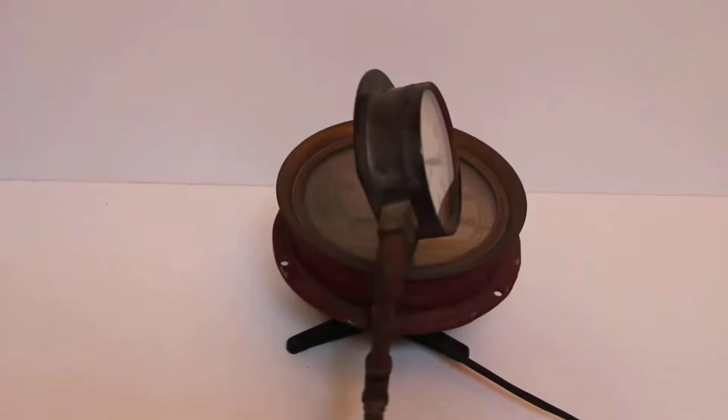Railroads did not just cut him from the advertising. They buried what was killing him: boiler pressures surging past the limit before tearing cabs apart, widows waiting 18 months for a $4,800 payout on a life.

The dark truth behind these men is not just how they suffered. It is that an entire industry was designed to make sure you would never know they existed.

Steam sold itself as progress. Every glossy postcard, every magazine ad, every railroad calendar promised speed, power, and a future racing just beyond the horizon. The locomotive gleamed, a silver bullet against the sky. The Empire on Wheels, read a 1907 postcard, its swirling Art Nouveau letters crowning the image of a spotless engine.

No soot, no sweat, no sign of struggle. The engineer sometimes appeared, arm raised, the very picture of command. But the fireman, the man who fed the beast, was never there. Not even a mention. The back of that postcard offered a poem to steel and steam, but not a word for the hands blistered raw in the cab.

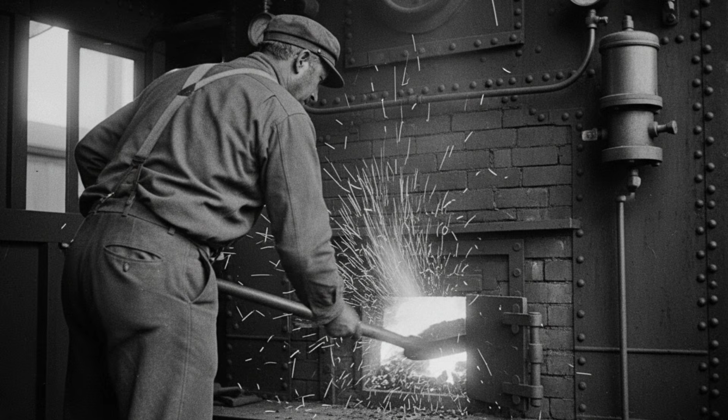Railroads knew the power of myth. They sold the public on the promise of adventure, of jobs that lifted men from the dirt and set them on the rails to glory. Opportunity awaits, the recruiting posters claimed, as if the path to prosperity lay straight through the firebox.

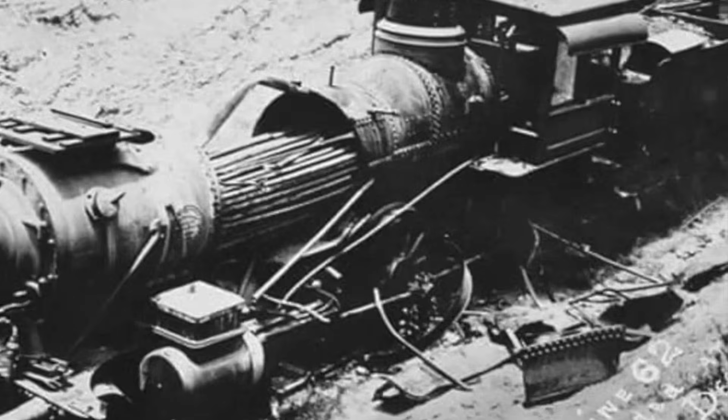The truth was buried under layers of ink and optimism. Every ad left out the choking coal dust, the heat that warped bones, the knowledge that a single missed gauge or a faulty valve could turn a shift into a death sentence.

The companies did not just erase the danger, they erased the men who faced it. In the golden age of steam, the worker became a ghost, sacrificed to keep the machine running and the legend alive. The public saw only the shine. The cost, measured in lives, was hidden in plain sight.

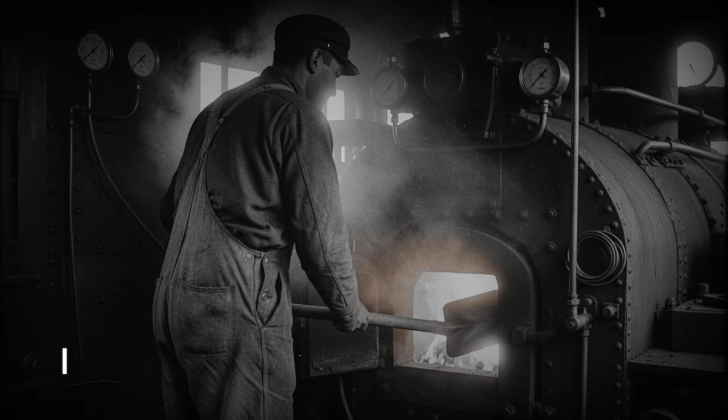In the shadows, behind every polished locomotive, a man stands alone, his face smeared with soot, his shirt plastered to his back with sweat. He has no name in the company brochures, no place on the commemorative plaques. The fireman is a silhouette half lit by the furnace he feeds and half lost in the smoke that chokes the cab. His hands grip the shovel, knuckles white, muscles burning from the endless rhythm of lifting, tossing, lifting again.

The world outside sees only the gleam of the engine, the promise of speed, the adventure of the open rail. Inside, the fireman breathes air thick with coal dust, his lungs filling with grit, his eyes stinging from the heat that warps steel and flesh alike.

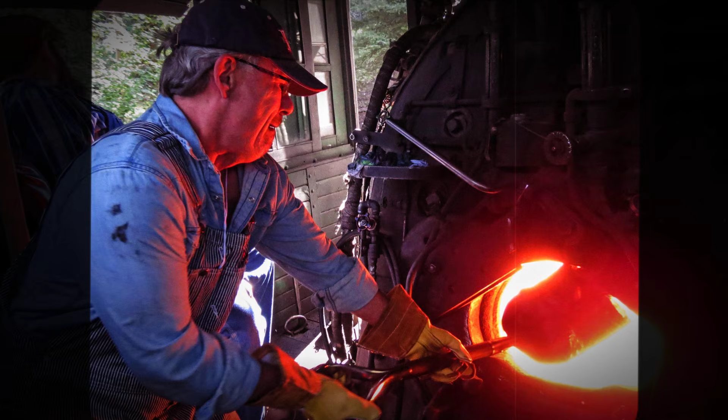No one asks about the man whose back bends with every mile. No one remembers who kept the pressure steady, who watched the water glass for the deadly drop, who risked being boiled alive if a single valve failed. The fireman's portrait is missing from the archives, his story wiped clean by the same hands that polished the brass.

In the rare photograph that survives, he stands in the cab, almost unrecognizable, face blackened, eyes hollow, caught in a moment between shovelfuls. He is not the hero of the railroad myth. He is its casualty. The golden age of steam demanded bodies to fuel its legend. The fireman was both the engine's beating heart and its most disposable part.

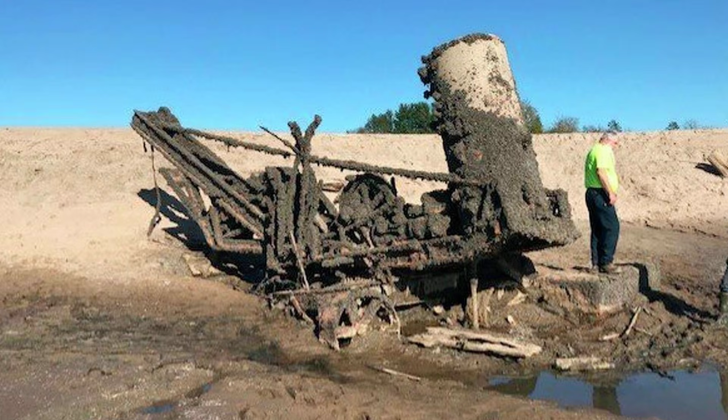When disaster struck, it was his name that never made the papers, his family that waited for a letter that never came. The cost of progress was measured not just in miles, but in men erased, swept away like ash from the firebox, leaving only the shine for history to remember.

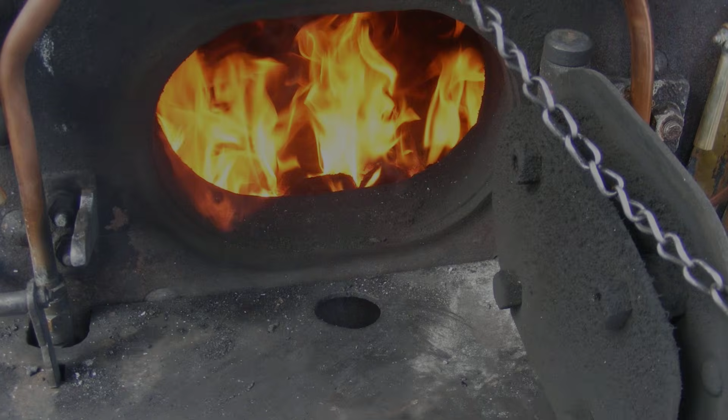The myth of the iron horse runs on sweat. Inside the cab, the fireman's arms never stop moving. Shovel hits coal, coal hits fire, again and again, 30 to 45 times a minute. The rhythm is brutal, mechanical, almost inhuman. Each scoop weighs 50 pounds, and there is no room for hesitation.

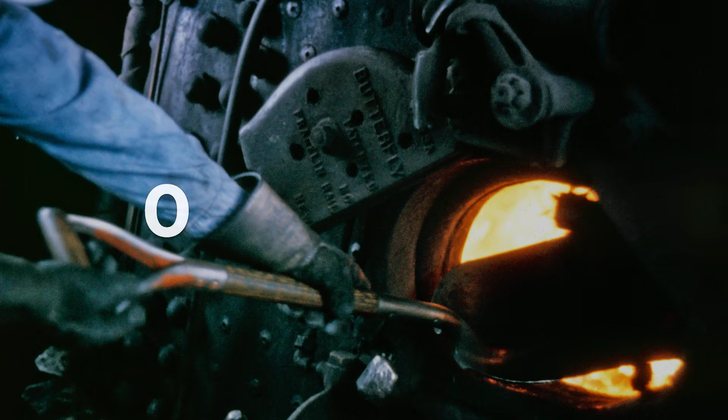On a steep grade, the demand doubles: 2 tons of coal an hour, every hour, just to keep the pressure up and the train alive. That is over 4,000 pounds, enough to break a man twice over before noon.

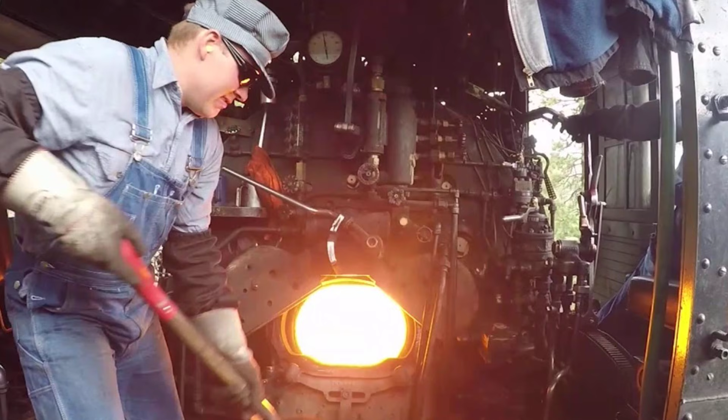The firebox roars 1,000 degrees, heat blasting through layers of soaked cotton and scorched skin. The air is thick with soot and ash, every breath a mouthful of grit. The fireman bends and lifts, shoulders screaming, back on the edge of collapse. There is no glory here, only the endless demand of the furnace.

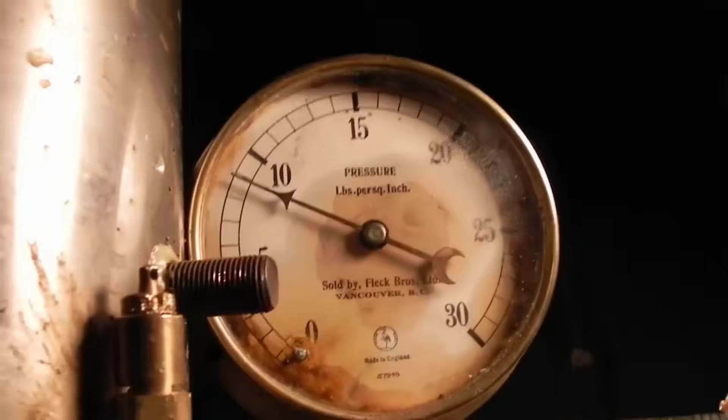Miss a beat, and the steam drops. Miss two, and the engineer curses, the schedule slips, the whole machine threatens to stall.

Railroad managers called this unskilled labor. They wrote quotas into the rule books: 1 ton per hour for freight, 2 for express, up to 4.5 on the biggest engines.

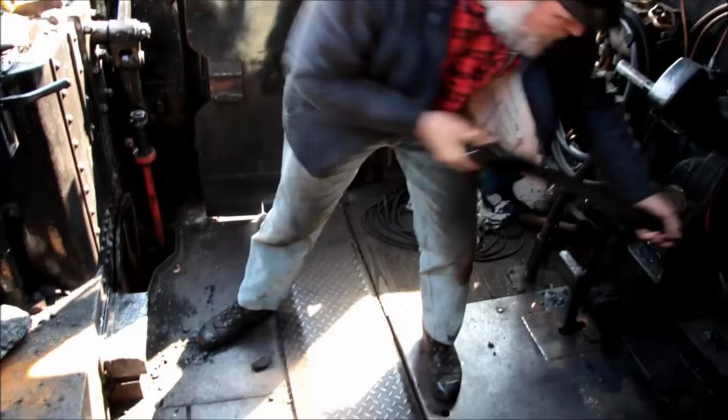The numbers look clean on paper. In the cab, they mean an unbroken marathon. One man racing a clock that never slows, shoveling coal until his hands bleed and his legs shake. No one counts the shovelfuls. No one records the moment his muscles give out.

The only thing that matters is the pressure gauge, the pounding of the pistons, the fireman's body feeding the beast. This is not the story on the postcards. The fireman's marathon is invisible, a blur of motion, a blur of pain. The train glides past towns and fields, but inside, a man is burning up mile by mile, erased by the very rhythm that keeps the legend alive.

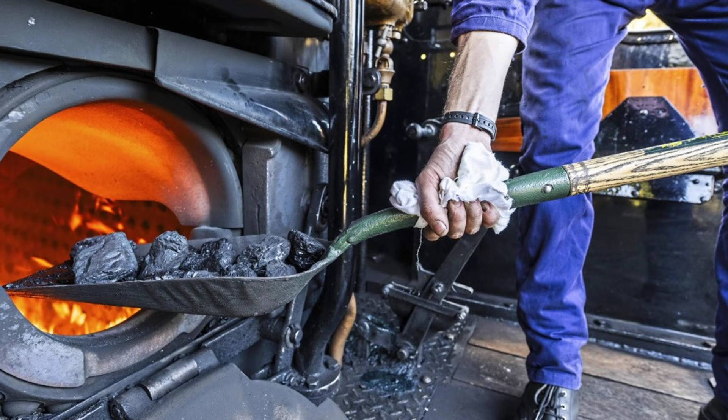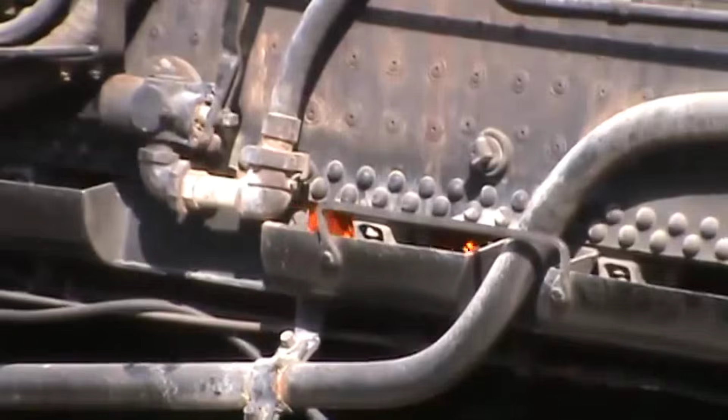The cab becomes an oven before the sun climbs above the rails. Temperatures inside reach 45, sometimes 55 degrees Celsius, a heat that blurs vision, soaks shirts through, and leaves skin raw. Open the firebox door and a blast of air hotter than a desert wind hits the face. The fireman stands just feet from a furnace burning above 1,000 degrees Fahrenheit, close enough to feel his eyebrows curl, his lips crack, his breath sear with every inhale.

There is no escape. Each shovelful costs more than sweat. The body burns through over 4,000 calories in a shift, more than a marathon runner, but without the finish line or the cheering crowd. Hunger gnaws at the belly, but the stomach turns with the stench of burning coal and hot metal. Water boils in the bottle before it can cool a parched throat.

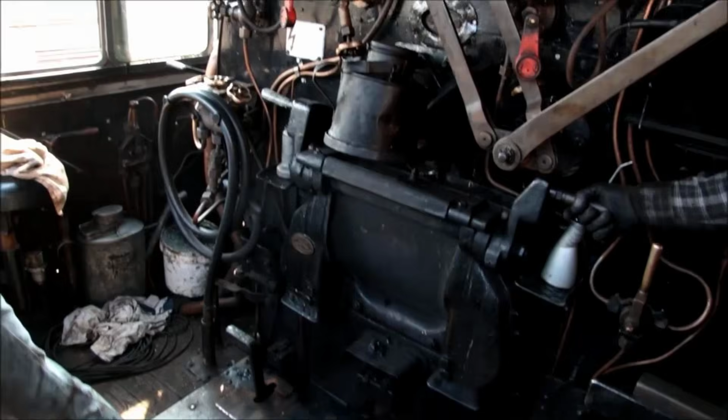Muscles cramp, hands blister and split, but the rhythm cannot break. The fire does not wait for mercy. Coal dust floats in the air, settling in the lungs with every breath. By age 40, a fireman's cough is as steady as the piston's beat. Medical surveys from the 1930s found chronic lung disease in more than 15% of firemen—black lungs, bronchitis, emphysema—diseases that ate away at life long before retirement.

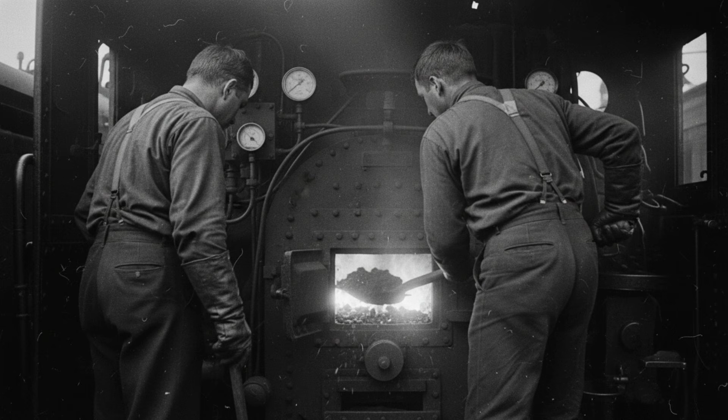Soot cakes the teeth, eyes sting. The world narrows to a tunnel of heat and grit. No one records the moment a back gives out or a shoulder tears. No one tracks the damage done by days spent in a rolling inferno. The company logbooks note the tons of coal, the miles traveled.

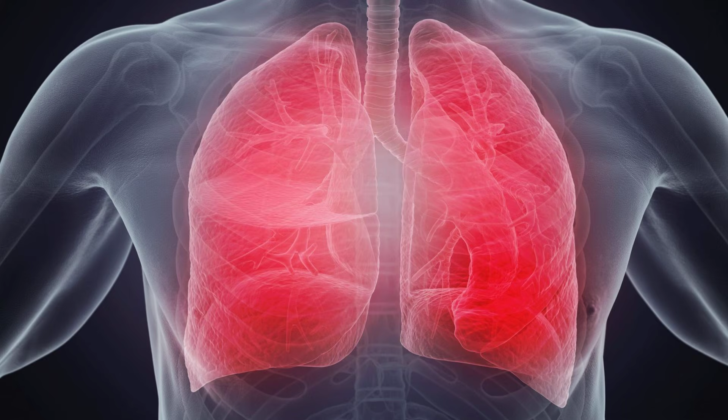They do not mention the fireman who stumbles off the engine at shift's end, trembling, gasping, older by years after a single run. The cost is written in flesh, in lungs that harden to stone, in hearts that race and fail, erased from memory as easily as wiping soot from a window. The fireman's body is the first casualty, sacrificed to keep the engine moving, invisible in the glow of progress.

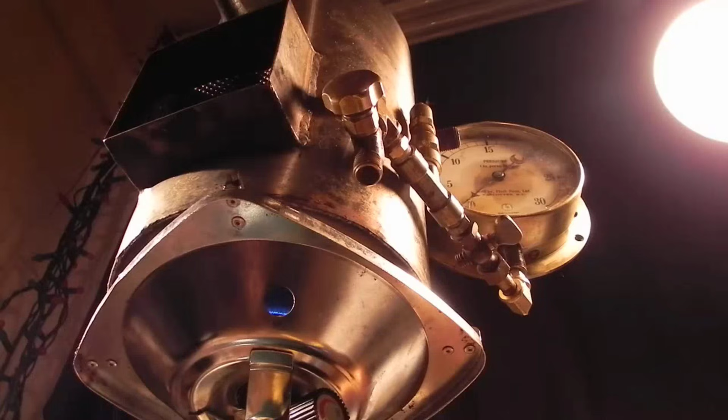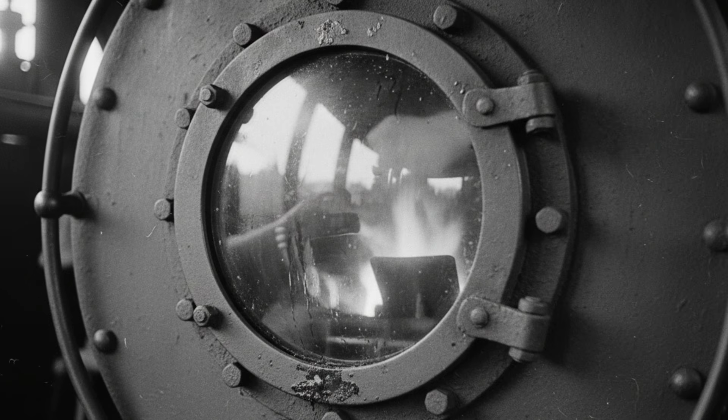Pressure built with every frantic shovelful. The fireman's arms never stopped, sweat poured, lungs burned, but the gauge kept climbing. The engineer barked for more steam, his eyes on the clock, not the needle. In the roar and glare, the fireman squinted at the water glass. Just a flicker, a shimmer, a guess at the level.

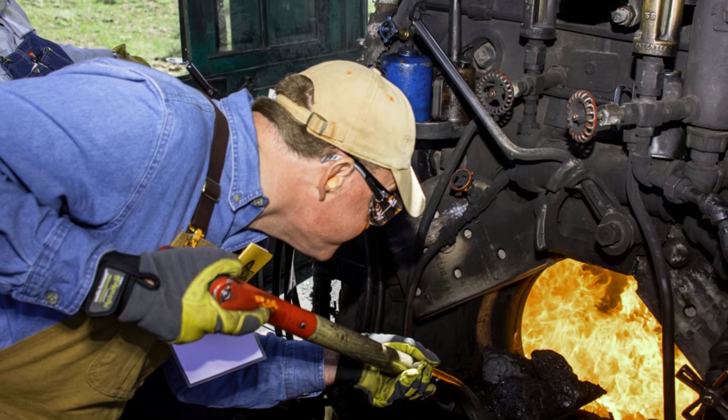One slip, one heartbeat too long. The water dropped below the crown sheet. The furnace raged hotter, the metal above it began to soften. Still, the shovel rose and fell. Still, the pressure climbed. The safety valve should have saved them.

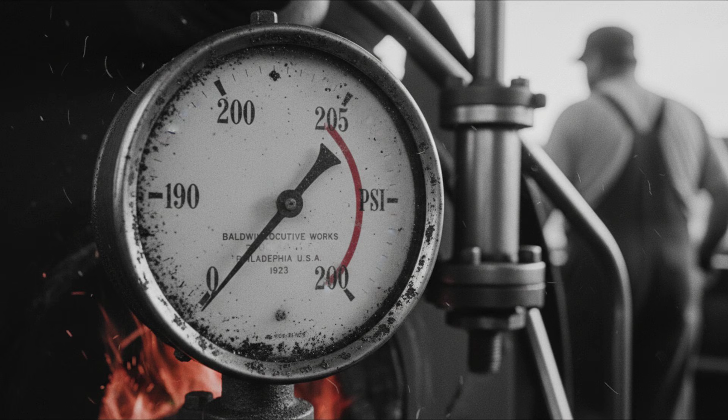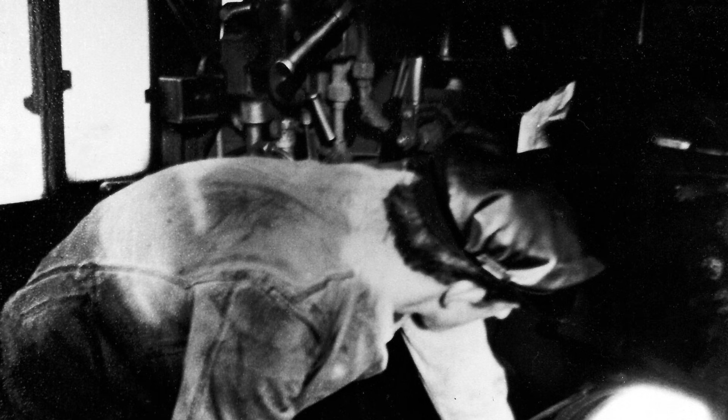It was set for 180 pounds per square inch, but rust and neglect had welded it shut. The number on the dial kept rising: 190, 200, 205. No relief, no warning. The fireman's hands were shaking now, knuckles white around the shovel, but there was no stopping.

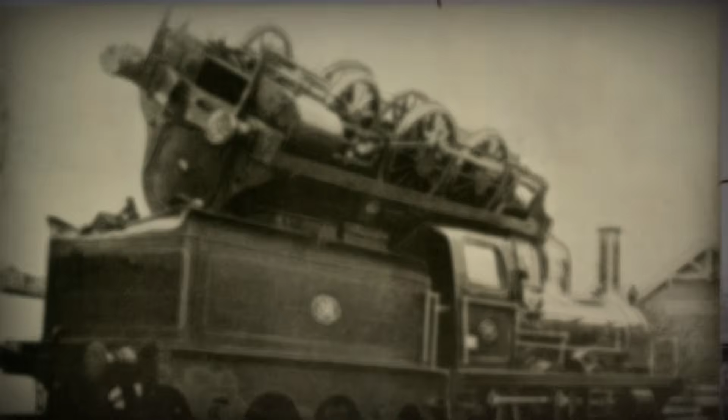At 210 pounds per square inch, the boiler became a bomb. Steel groaned, rivets strained, and then, in a split second, the world split open. The fireman's body, his labor, his vigilance, his fear, was erased in an instant. The company logbook would call it equipment failure. The truth was written in the chain: fatigue, a missed reading, a silent valve, and a pressure surge that turned flesh to ash.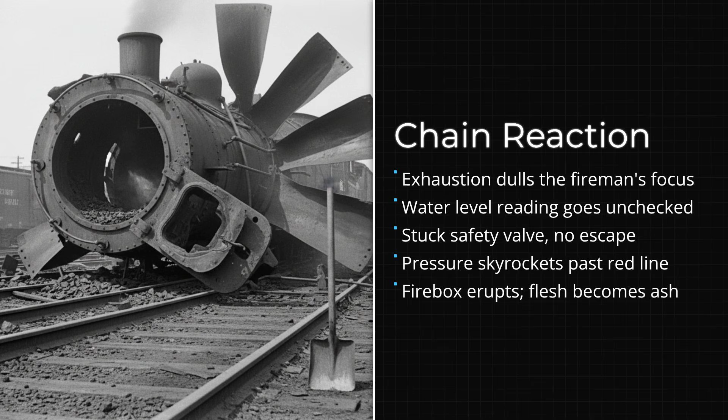A widow stands in a silent room, her hands folded around a letter stamped with the seal of the Interstate Commerce Commission. It has been 18 months since the blast tore her world apart. 18 months of waiting, of hearings, of signatures and affidavits.

The coroner's report calls it equipment failure. The company's lawyer calls it contributory negligence. The ledger calls it a loss. One fireman, age 34, survived by a wife and 2 children. There is no ceremony, no public reckoning. Instead, there is a number.

$4,800. That is the price of a life, calculated by statute and delivered in a settlement check. The sum is less than a year's engineer's wage, less than the value of the engine's brass. It arrives after 18 months of forms and denials, after the company's final appeal fails. The widow receives the check with a trembling hand and a warning. Acceptance means silence, no further claim, no right to protest the terms.

On the company's balance sheet, the fireman's death becomes a line item. The ICC code is entered, the payout recorded, the case closed. The man whose body fed the furnace is reduced to a claim number, his suffering translated into dollars and cents. The machine rolls on. The cost of progress is paid not in memory, but in paperwork. The ledger is balanced. The story is erased.

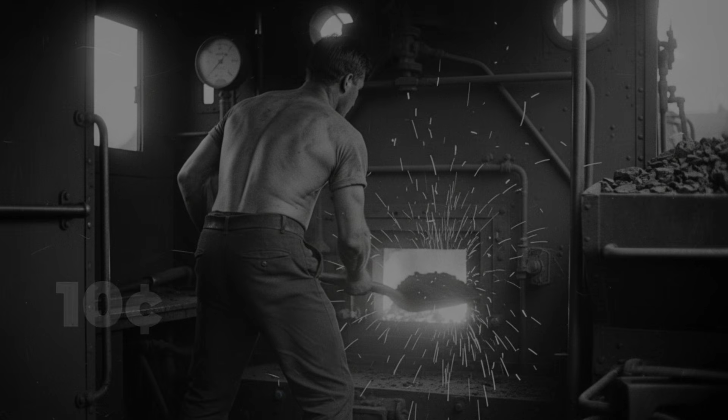To keep the pressure up and the profits higher, some railroads dangled a bonus, 10 cents for every ton of coal shoveled above quota. A fireman who broke his back to feed the furnace faster could earn an extra $1 on a brutal day. That bonus was bait, a prize for pushing the body past its limits, for risking a slip, a missed gauge, a fatal mistake.

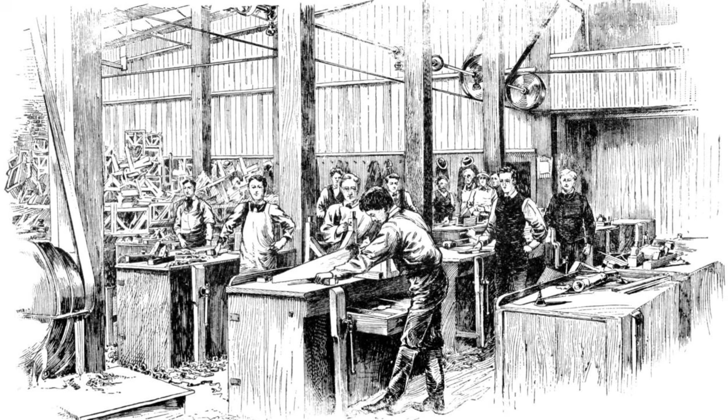The more coal moved, the more money saved on schedules, the more risk shifted onto the man with the shovel. There was no hazard pay, no formal danger allowance. The company called the job unskilled, justified the low wage, and left the fireman to carry the cost. Training was a formality, 30 hours of apprenticeship, then straight to the cab, fines for missed readings, blacklisting for mistakes.

The fireman's value was measured in tons, in minutes, in dollars. If he faltered, there was always another man waiting, another name to enter in the ledger. The cost of a life, calculated and forgotten, buried in company books as just another expense.

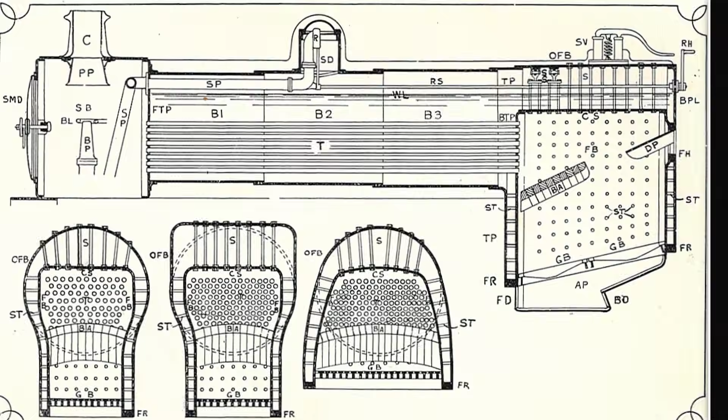The tools, meant to stand between a fireman and death, sat bolted to the boiler, ignored, neglected, or quietly sabotaged by the same companies that called the men who used them unskilled. Technical manuals from the 1900s listed every safeguard: the safety valve, the fusible plug, the water glass. Each device could have made the cab less of a death trap.

The safety valve was supposed to release steam at 180 pounds per square inch, a last warning before the boiler became a bomb. The water glass, a simple tube, offered the only real clue to how close the fireman was to disaster. The fusible plug, a plug of soft metal, would melt and vent steam if the water dropped too low, giving a fleeting chance to escape.

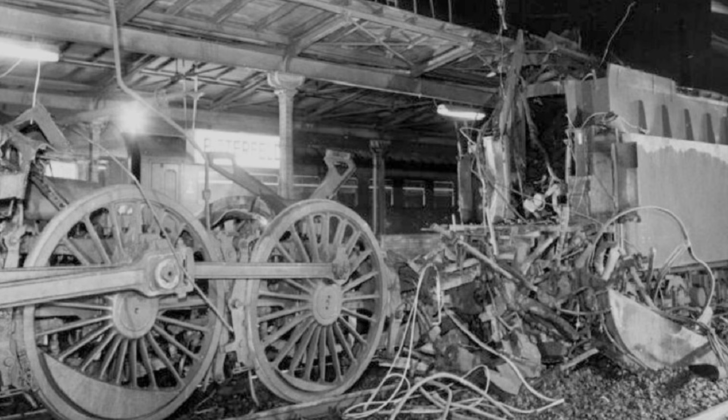But these lifelines were only as good as the maintenance behind them. Inspection logs from the era are filled with skipped tests, rusted valves, and plugs so caked with ash they might as well have been welded shut. Boiler Inspection Act reports from 1911 onward show that many explosions had nothing to do with bad luck or bad design. They happened because a safety valve hadn't been checked in years, or a water glass was left clouded with scale. The devices were there, but the will to keep them working was not.

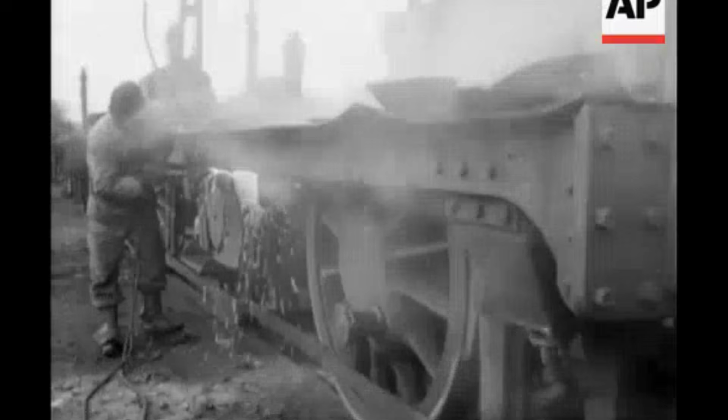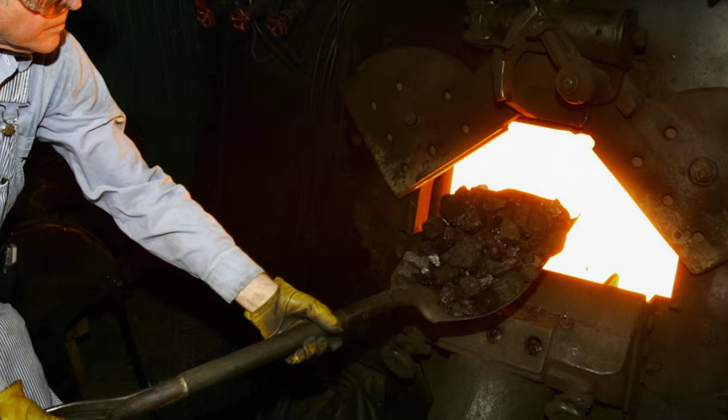Mechanical stokers, machines that could have spared a man's back and lungs, were available by the 1920s. Still, most firemen kept shoveling by hand, their bodies cheaper to replace than a new piece of equipment. The company ledger called them expendable. The accident reports called them casualties. The technology sat unused, a silent witness to how little the system valued the men it claimed were too unskilled to deserve more. The tools of survival existed, but the men who needed them most were left to face the fire alone.

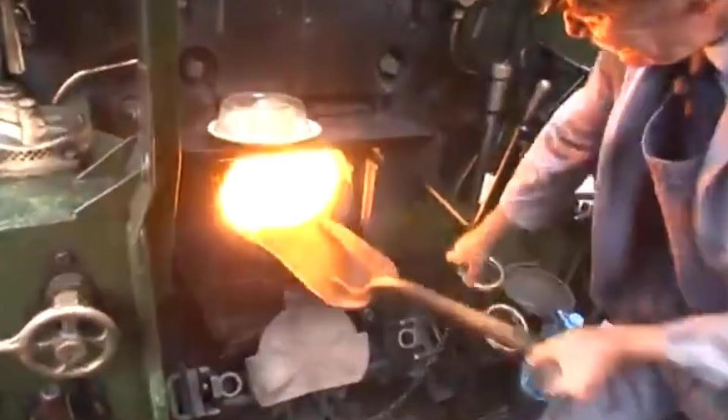They called him unskilled, a body with a shovel, a name that could be crossed out and replaced before the coal dust settled. But the fireman knew better. 30 hours of apprenticeship, sweating through the first lesson with a veteran's eyes on his every move, was all the railroad demanded before sending a man into the furnace.

Miss a reading on the water glass, and the fine came down, $5, $10, $20, docked from a wage that barely kept food on the table. One mistake, and your name vanished from the schedule, replaced by another desperate man willing to risk his life for a chance at steady work.

But in 1905, something cracked. The Brotherhood of Locomotive Firemen and Enginemen gathered in a smoke-filled union hall, the air thick with the memory of men lost to boiler blasts and company neglect. They passed a resolution: no more silent suffering, no more pretending that survival was just luck.

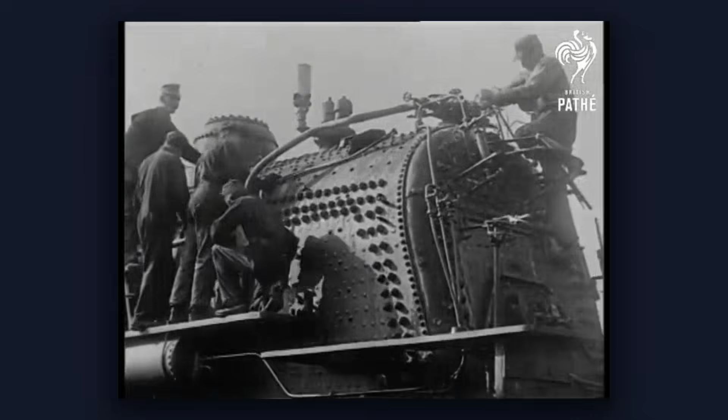The text was blunt: quarterly safety valve tests, mandatory calibration of the water glass, and a real apprenticeship. Not just 30 hours, but proof a fireman could read the signs that meant life or death. Violations would bring fines on the railroad, not just the man with the shovel. For the first time, the fireman's knowledge was written into the rulebook, not as a courtesy, but as a demand.

This was the spark, no longer a single man standing alone against the firebox, but a collective voice refusing to be erased. The Brotherhood's resolution was more than a plea for better tools or a safer cab. It was a declaration. Name us skilled, because the work demands it. Name us skilled, because the cost of ignorance is measured in bodies. The fight was no longer just for a wage, but for the right to survive a shift and be remembered after the whistle faded.

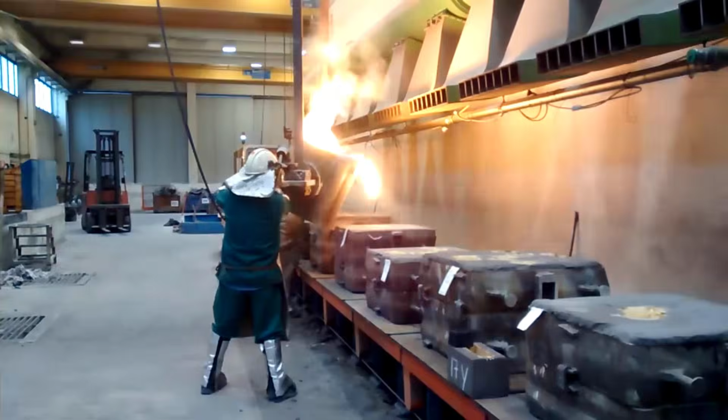The fireman's sweat turned profit into myth. His body was the cost buried beneath every whistle and postcard. Today, industries still call danger a ladder, and still burn through lives to keep engines running. The blackened overalls change, but the calculation does not.

When labor's sacrifice is erased, exploitation thrives in the silence. How many more stories will be lost under the roar? Share your thoughts below.